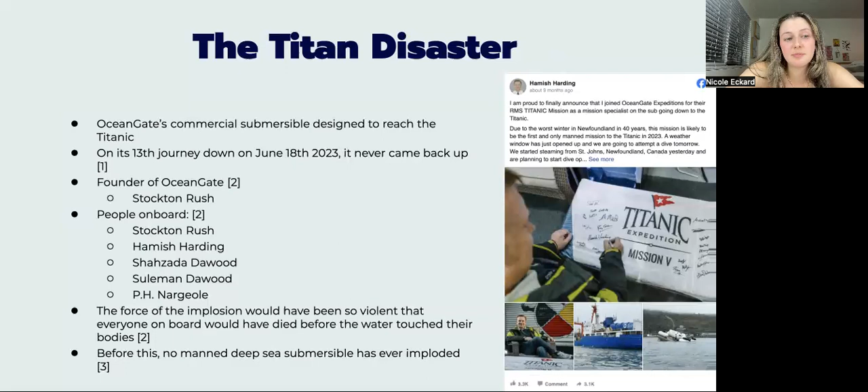The force of this implosion would have been so violent that everyone on board would have died before the water touched their bodies, so they wouldn't have felt it, which is good. Before this, no manned deep sea submersible had ever imploded.

So let's go through the final steps of the Titan's final journey. At 8 a.m. that Sunday, it submerged under the water. An hour and 45 minutes later, it lost contact with the Polar Prince, which was the boat that towed it to its location.

It also dropped the weights, which indicated that they were trying to abandon their mission because something bad had happened. It was supposed to resurface at 3 p.m. that day, and it never came up.

At 5:40 p.m., the Coast Guard was notified that something was wrong and the vessel never came back. Later, acoustic data found an anomaly consistent with an implosion when the communication was lost.

However, after that, sonar equipment detected banging noises Tuesday night and Wednesday morning. So some people thought that the Titan was still out there and the people were still alive.

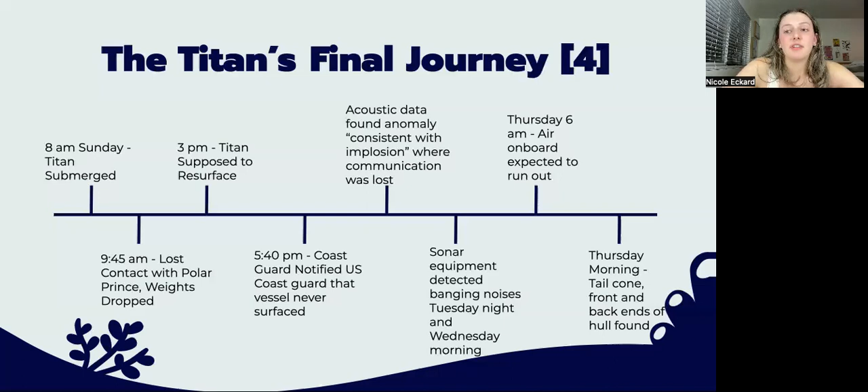Thursday at 6 a.m. was when the air was supposed to run out on the Titan, meaning the people would definitely be dead. Later that morning, the tail cone and front and back ends of the hull were found, and they figured out that the Titan had imploded and everyone was dead on board.

Just to start off, the differences between a submersible and a submarine: the Titan was a submersible, and submersibles are manned. They only go down for a few hours, and they need a mothership to get them to their location in the ocean. A submarine is usually autonomous, and it has enough power to go down for weeks or months, and it can leave from a port itself, so it doesn't need a mothership or any boat to tow it anywhere.

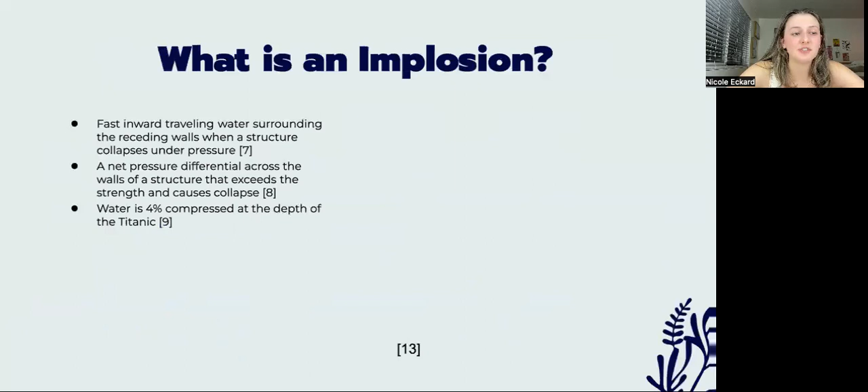Just to go over what an implosion is, there's a quick video here to watch.

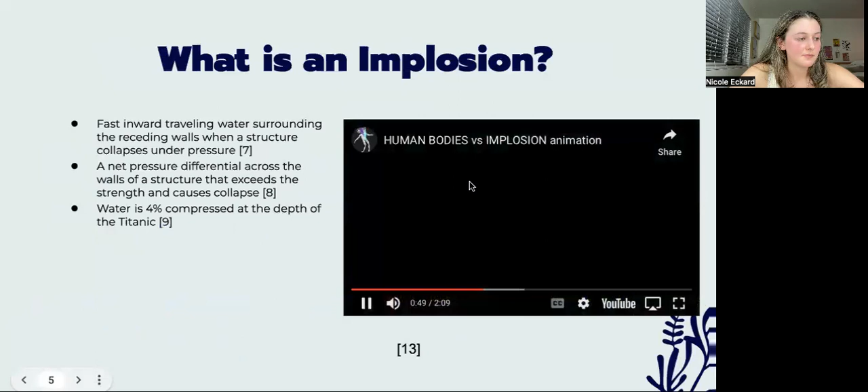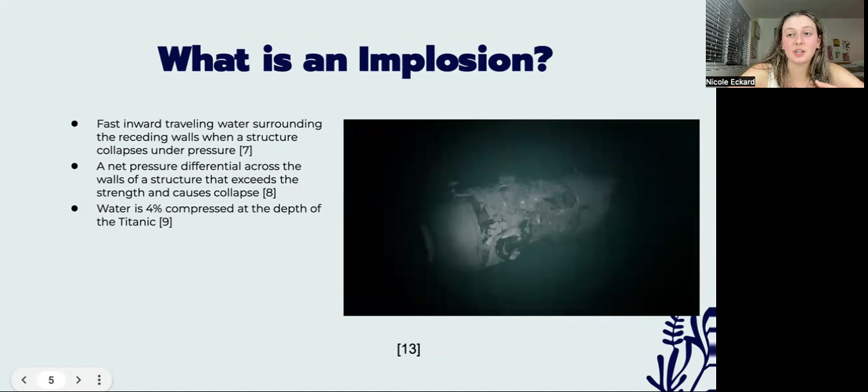This kind of just shows how fast the Titan would have imploded, and that shows how the Titan probably imploded. An implosion is just fast inward traveling water surrounded by receding walls of a structure when it breaks under the pressure. It's the net pressure differential across the walls that causes the collapse. So yeah, that's pretty much what happened with the Titan.

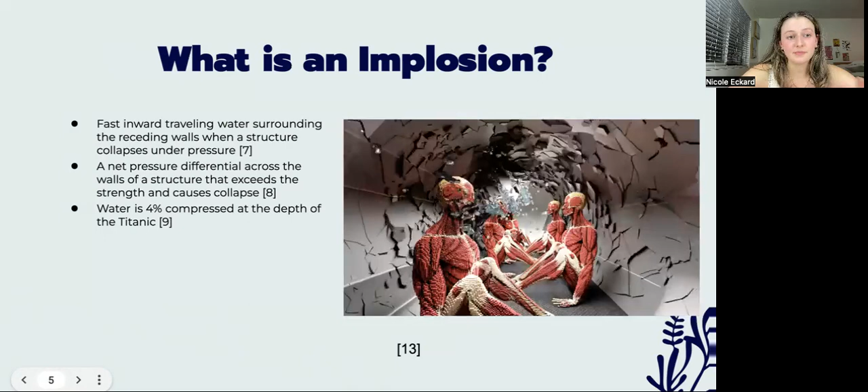At the depth of the Titanic, water is 4% compressed. Water is not really a compressible fluid, so when it is compressed and gets exposed to the 1 atmosphere chamber, it would be like releasing a spring with high explosive force similar to the speed of sound. You can just imagine how dangerous that force would be.

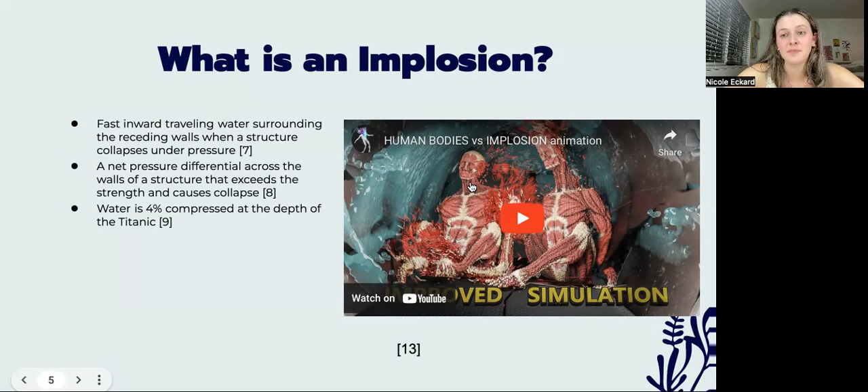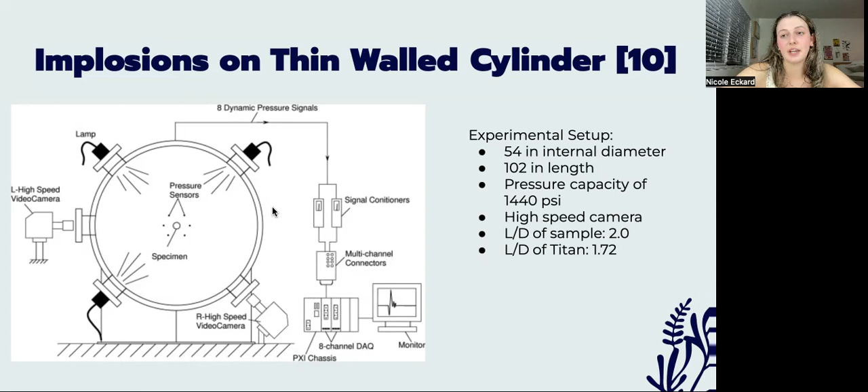The length over diameter, the L over D, that they did in the sample was 2.0, and the length over diameter of the Titan was 1.72.

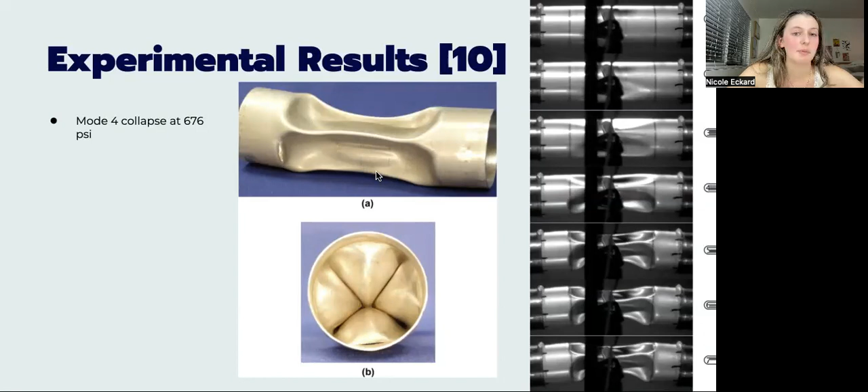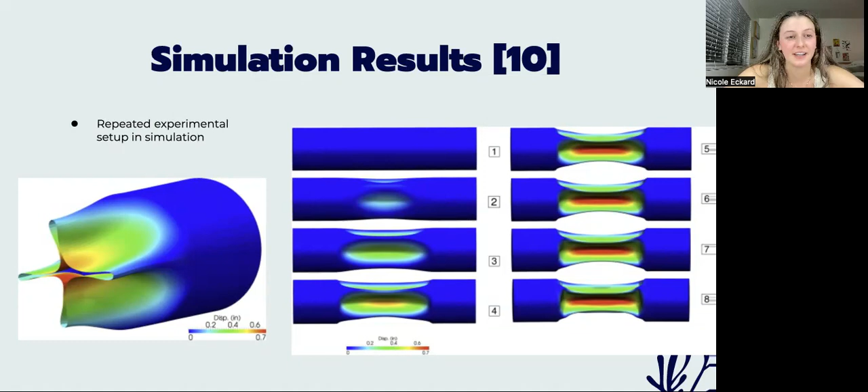After this, they repeated that same study in a simulation and found the exact same thing, which told them that their experimental setup was correct and verified the data. So yeah, that's pretty much what an implosion is.

A successful submersible that exists is the Alvin, and it was actually able to successfully travel up to 6,452 meters. A reason it is so successful is because it has a lot of routine inspections, it's always being recertified, and the Navy is auditing it a lot.

It's also disassembled, evaluated, and reassembled every few years, just to make sure everything's good. And at this point, at 6,400 feet or meters, it can access 99% of the ocean floor, so pretty much the entire ocean.

It also has a lot of redundancy, so if there's a failure, there's something else to back it up so it won't completely fail.

They call off dives if there's any suspicion. One instance of that was when they got new windows in one of the iterations of the Alvin, and they noticed a little nick in the window. Instead of continuing, they called off the dive and re-evaluated it, realizing that could have caused an issue.

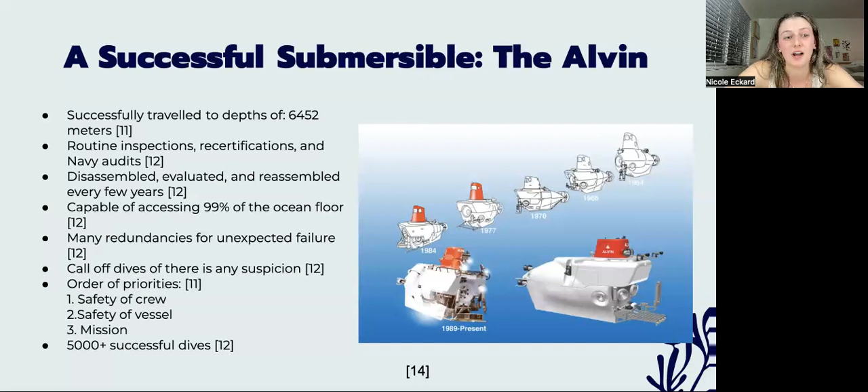So they were really strict about not going on dives if there's a problem, which you'll see the Titan was not doing at all. Their order of priorities on board was first safety of the crew, then safety of the vessel, then the mission. So safety was always more important than the mission, which is the opposite of how the Titan was operated. It's had over 5,000 successful dives.

Moving on to the differences between the Titan and the Alvin, there's a lot of key differences. The Alvin had a spherical hull, while the Titan had a cylindrical hull. The Alvin could only hold up to 3 passengers, while the Titan held 5, so it was a much larger hull. The Alvin was made out of titanium, and the Titan was made out of carbon fiber, which we're going to go into later about why that's bad.

The Alvin had a mothership, so it didn't get towed - it was literally on top of the ship and then put into the ocean, whereas the Titan was towed behind the boat, which could have caused extra damage to the submersible. The Alvin also had multiple small windows throughout its body, while the Titan had just one large window.

So there's 4 key reasons that I think it imploded. The main one being the hull, which was made of carbon fiber, and its shape. Also, I think the viewport was just a bad design, and the same with the whole warning system. Overall, it was just not a clean sheeted design, which is never a good idea for any engineering thing you're going to make.

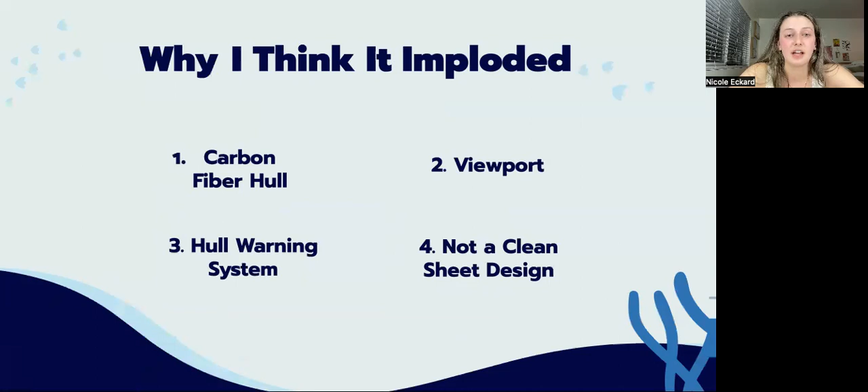Moving on to the carbon fiber hull - there's been reports of people who went on successful journeys of the Titan saying they could hear cracking during the entire journey. They could just hear it, and that's pretty scary.

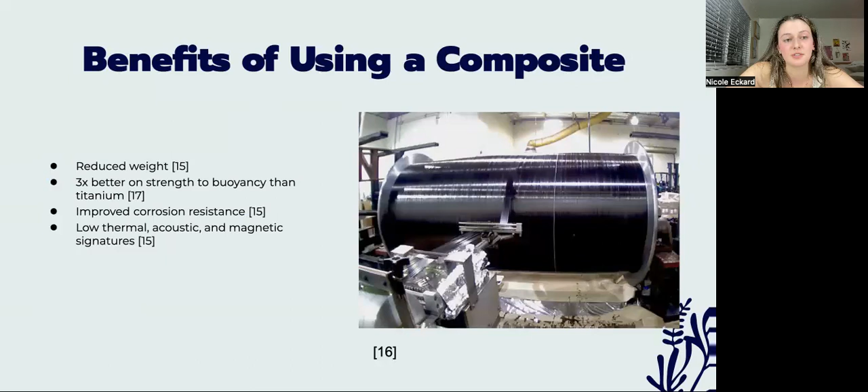The reason OceanGate even wanted to use a composite is because there are some benefits of using a composite for ocean journeys. First off, it's much lighter than titanium, and it's 3 times better on strength to buoyancy than titanium. It also has better corrosion resistance because seawater is a very corrosive environment, and composites don't corrode as fast. Composites also have low thermal, acoustic, and magnetic signatures.

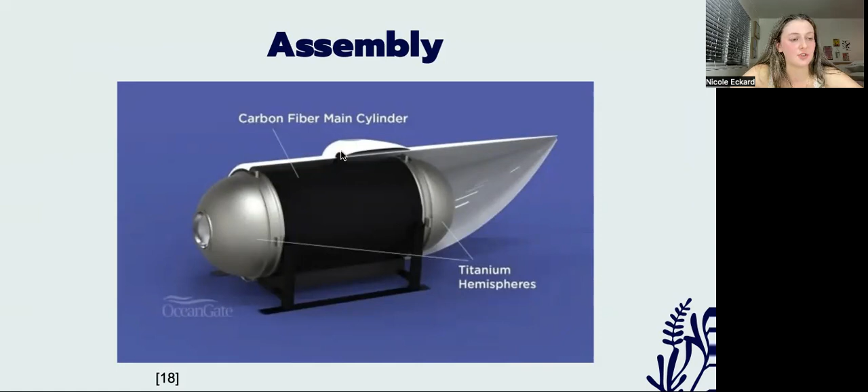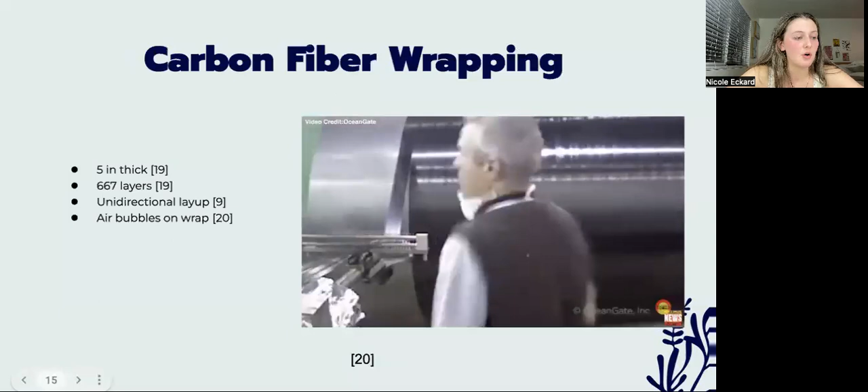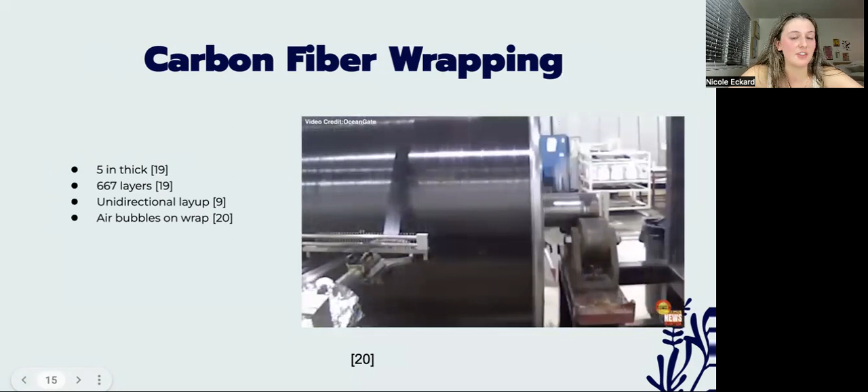Here's a video of how the carbon fiber wrapping was made. You can see it was wrapped around the hull only in one direction, unidirectional, which is really bad because it means it's only going to be strong in that one direction of the wrapping. It ended up being 5 inches thick with 667 layers. You can see air bubbles in the wrapping, which could cause little imperfections, not good in the long term for the strength of this.

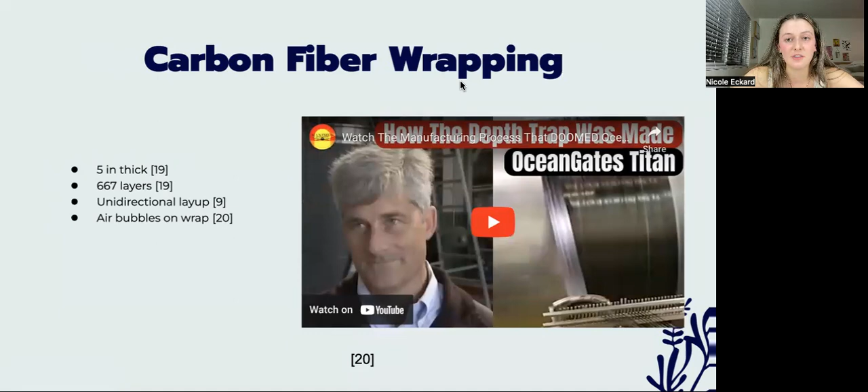Another issue was the adhesion method for joining the carbon fiber hull and the structural titanium rings - glue was the only way they joined the 2 rings.

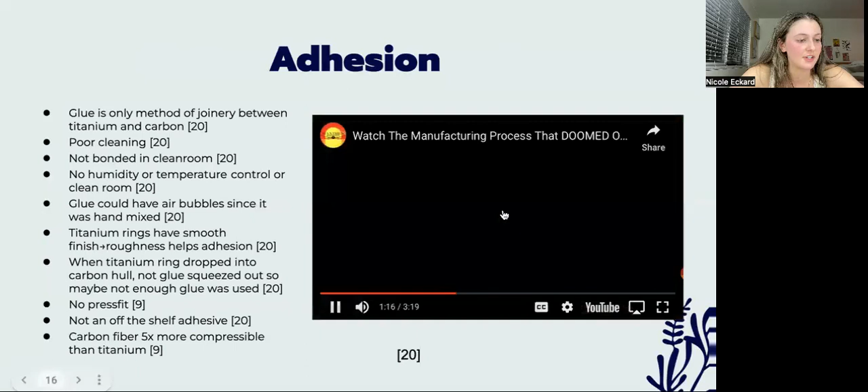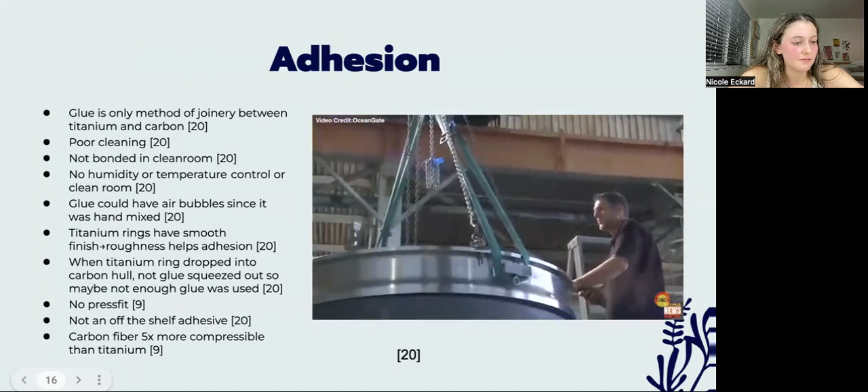I'll play this video too, showing it. The 2 components - really what's holding them together and allowing them to move together is the glue. You want nice, even movement. You can see here the glue, they were just dropping it in, and you want to make sure it's right into the hull.

It's pretty simple, but if we mess it up, there's not a lot of recovery.

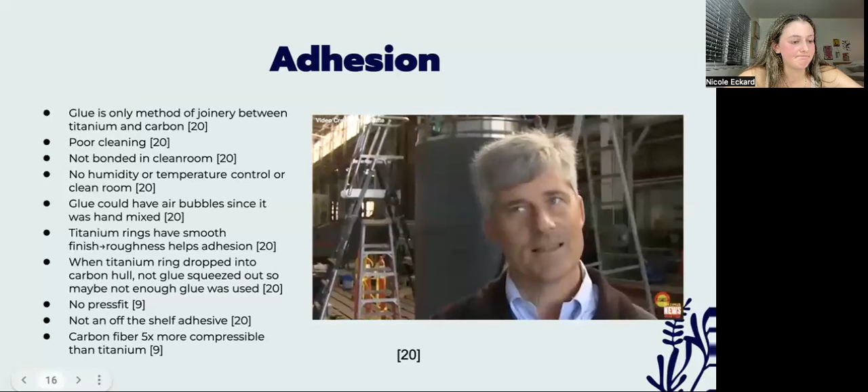Just to expand on that video, the glue was the only method of joinery between the carbon and titanium, so they didn't use any bolts or anything as a secondary method.

If you saw in the video, they were just cleaning it with a rag, but his hand was following behind it, getting it dirty again and adding oils. When doing adhesives, you don't want anything on the surface, so they definitely could have done a better job cleaning it. It was also not bonded in a clean room, which would have been a better environment to ensure the bond was good, and again there was no humidity or temperature control or clean room.

The glue was hand mixed for the adhesive, so there could have been air bubbles, and there's no commercial off-the-shelf glue proven to work for this kind of bond they wanted to make, so they had to improvise and make their own glue. There's no way to know if that glue would work, especially because they didn't do any testing.

If you saw in the video, the titanium rings were very smooth, and usually with adhesives you want a rough surface because it increases the surface area and makes it easier to bond the two together, making the bond stronger.

In the video, when the titanium ring was dropped into the carbon fiber hull, no glue squeezed out, so it's possible they didn't use enough glue, because with good surface contact you'd expect some glue to squeeze out. It also wasn't press fit in, it was just dropped right in, and if it was press fit, glue would have come out. So again, there was no off-the-shelf adhesive used.

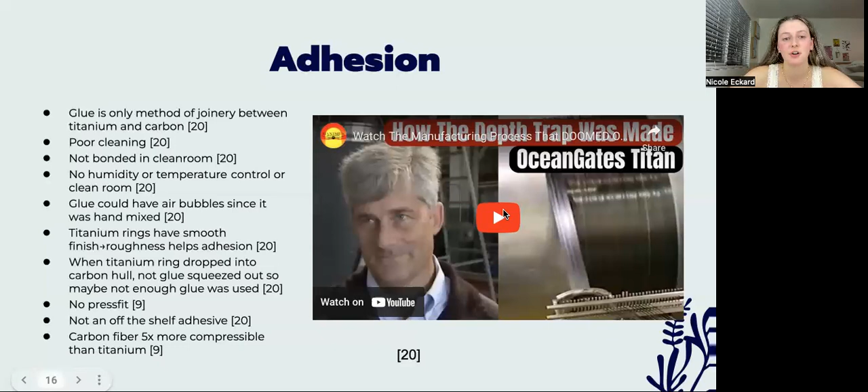Check measurements. Now moving on to the shape of the hull. Again, we can see the Alvin had a very spherical hull, which you can see in the picture here, while the Titan had a very cylindrical hull.

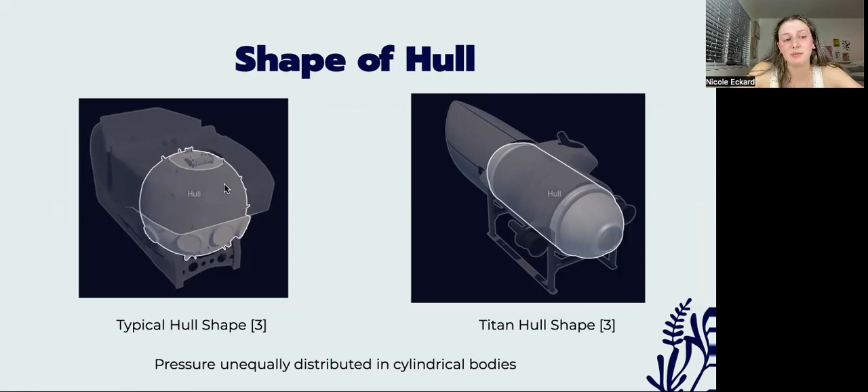In a cylindrical hull, the pressure is unequally distributed around the body, which could cause it to crush like a soda can. That's why typically all hulls in submersibles are spherical.

To relate this to airplanes - why a spherical hull is better than a cylindrical hull in the air - in a spherical stress matrix the highest stress is PR/2T, while in a cylindrical stress matrix it's PR/T, so twice as high.

This isn't the exact relationship for submersibles because all the data is still really experimental, and there's no closed solution for the stress matrix of submersibles, but it would be a similar relationship in that the sphere would be a lot stronger than the cylinder because the pressure is more balanced.

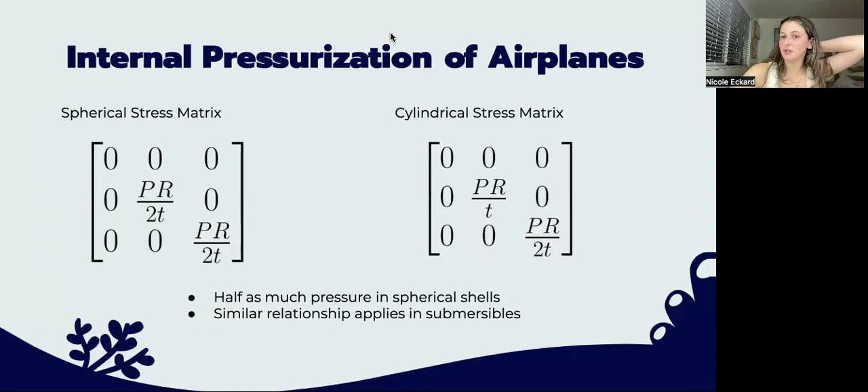In an airplane, that's why carbon fiber works - the pressure inside is tensile stress because the air inside wants to expand, so it's pulling the carbon fibers apart.

But in a submersible, the pressure is coming in, so the carbon fiber is actually in compression, and it's really not strong in compression.

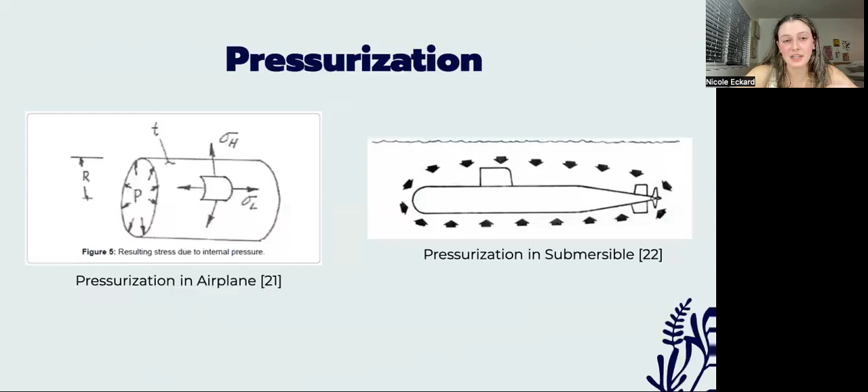Later we're going to have a video on carbon fiber in compression.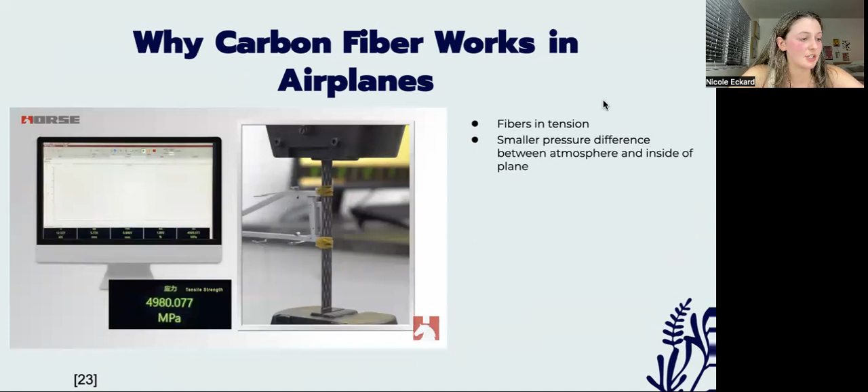Okay, so why carbon fiber does not work for deep sea compression or deep sea applications. As you saw in the previous slide, the fibers are in compression, and carbon fiber is not strong in compression compared to its tensile strength.

Carbon fiber is really only strong in the direction of the fibers, and the fibers were wrapped only unidirectionally, which means they would only be strong in one direction. Under any unstable loading, the carbon fiber would just not be strong at all. The strength in the other directions of the fiber are pretty much equivalent to the strength of the adhesive, which is not as strong as it should be.

And then the compression causes the buckling. So obviously when it's under compression, it causes the individual fibers to buckle and break. And then the cracks are also very hard to see because they're usually embedded in between the layers, so you won't be able to see the cracks from a visual inspection.

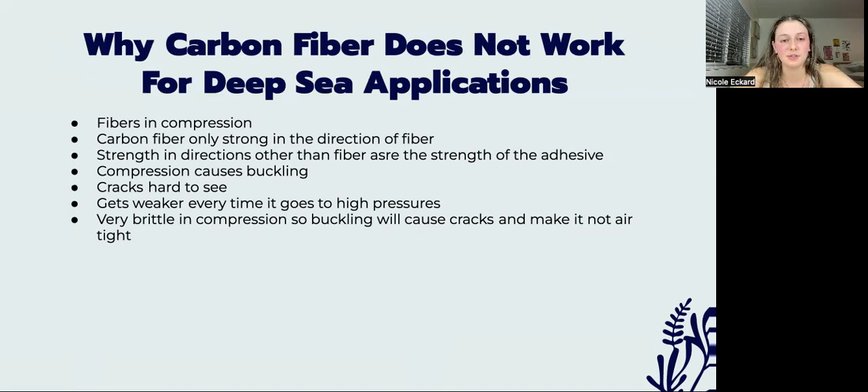So this was a study done on the implosion of carbon or epoxy composite hollow cylinders. The first study we looked at was metal, which isn't really related to the Titan. This one was actually done on carbon composite hollow cylinders, laminated carbon epoxy composite tubes that were filament wound, which is the same as the Titan, so they're kind of related.

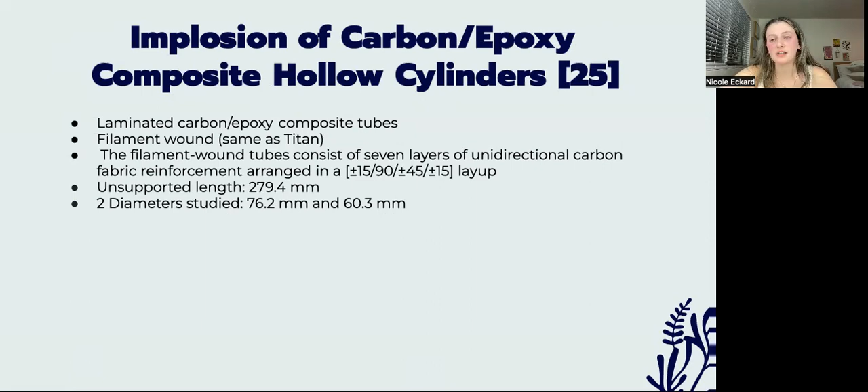The filament wound tubes also were 7 layers of unidirectional carbon, but placed in different angles, so this actually would have been stronger than the Titan. The unsupported length in the experiment was 280 millimeters, and they studied 2 diameters - I'm only focusing on the 76.2 because it gives a more similar length over diameter ratio as the Titan. So this was the experimental setup.

You can see it's pretty similar to the other tests I talked about, conducted in a large spherical pressure vessel, with a maximum pressure rating of 6.89 MPa. They flooded the vessel with water to get the best optical clarity they could, then filled it with nitrogen gas to pressurize it, increased gradually at 0.083 megapascals per minute until the specimen collapsed.

So this was what they did the test on. They had a speckle pattern on a cylinder, painted with marks of at least 2 millimeters diameter, so that each mark is 3 by 3 pixels in the recorded images.

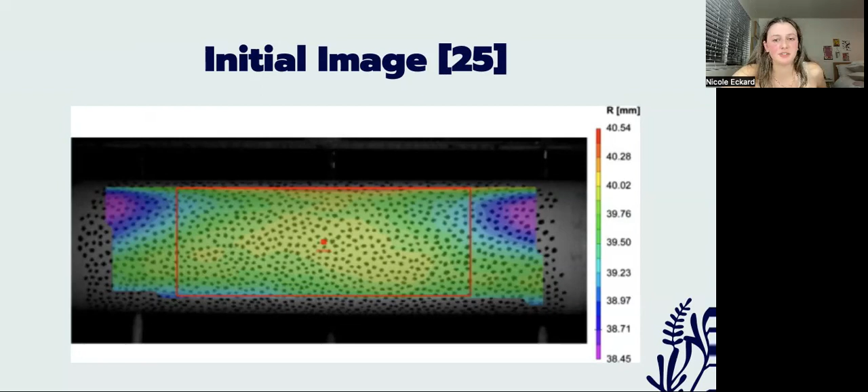So these were the results of the experiment under pressure. They found that the shorter L over D were a lot stronger, obviously, because they have a much smaller unsupported length.

Going through the testing here, at time B you can see cavitation begin and a longitudinal crack about to start. After this, once the crack began, there was an abrupt drop in the local pressure inside because it was breached, and that caused an increased acceleration due to the structural instability.

At time C, you can see this was the minimal pressure the specimen ever received, and there was even more cavitation coming, an increase in velocity magnitude and sudden loss of pressure, creating more longitudinal cracks. You can see in E it's actually starting to rip apart.

If you look at the plot here, you can see 2 peaks at E and F, similar to the peaks found in implosion studies, meaning that's when the wall contacts the center of the structure, which created those peaks.

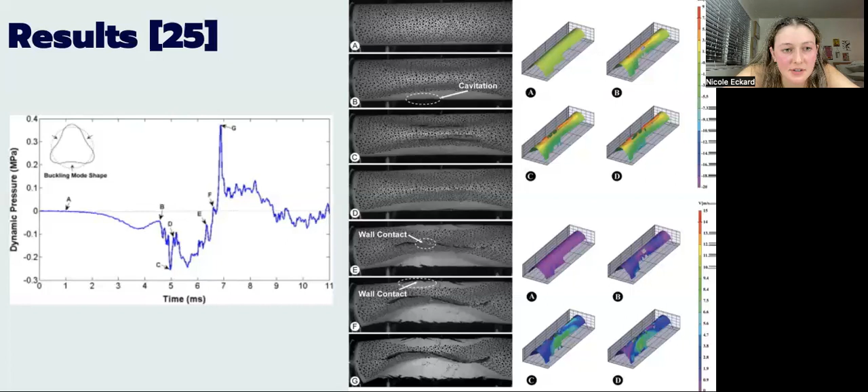You can see the largest peak in G, and that's from the high magnitude pressure pulse that caused the final buckling, which you can kind of see in the picture in G - it's like the worst of all the pictures.

From the results you can see there were longitudinal cracks, shown in A, and in the second picture in B they used optical microscopy to show the cracks, which are parallel with the fiber angle - meaning they were in regions of high tensile stress and propagated through the weak resin structure.

And then where C is, there's the fractured fibers, and those fibers are very short and very small. So that just shows that it was a pretty brittle collapse, and there was very little fiber pull-out.

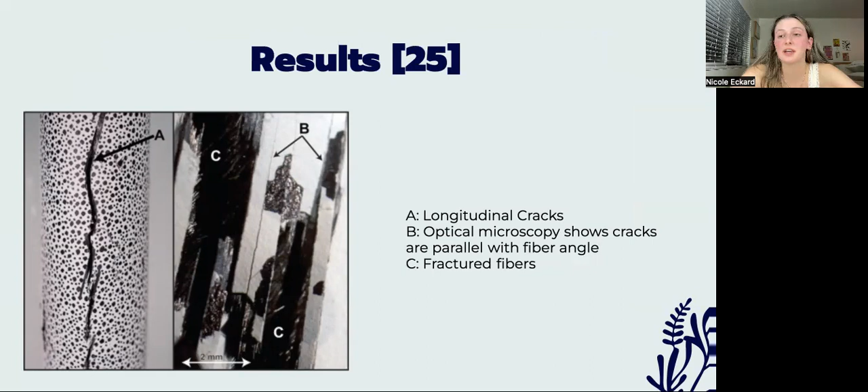And then these are just different carbon fiber buckling modes. Going back to the previous one, I think the Titan actually failed in a manner similar to what this study was showing, so it most likely did implode like this study. I think that was the main failure mode of the Titan, the thing that made it go bad the fastest and the quickest. But all the other things I'm going to talk about just added to why the Titan was bad. So again, here are the different carbon fiber buckling modes you can see.

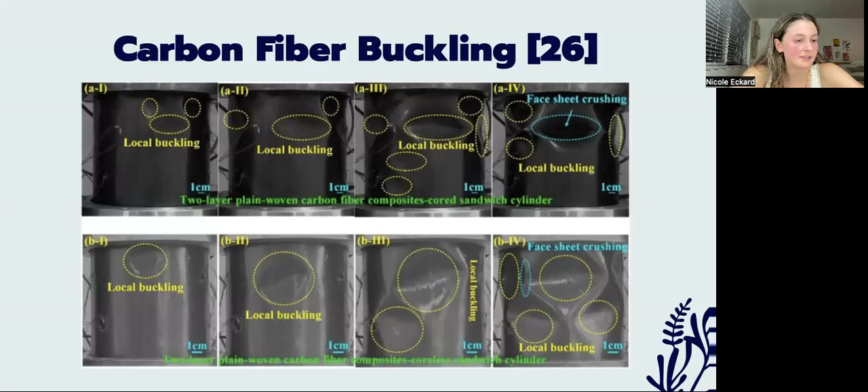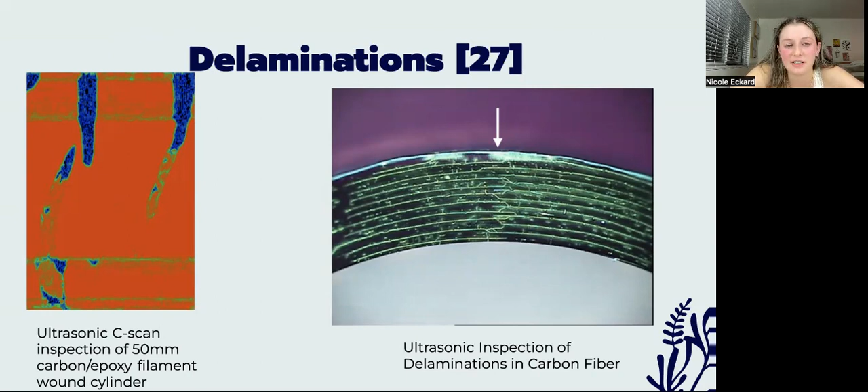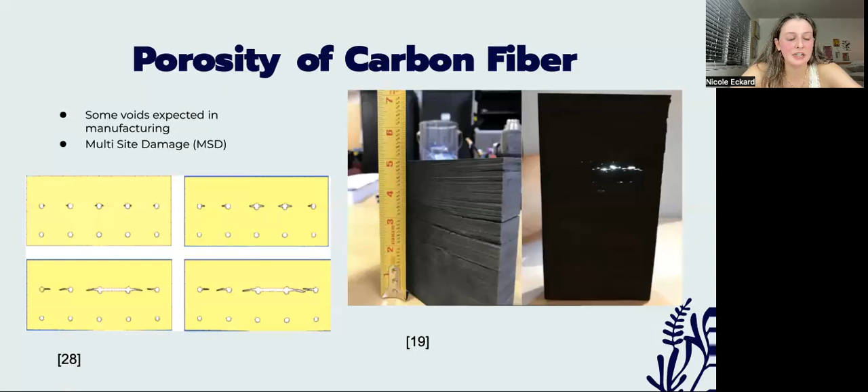Specifically for the Titan, it was found to be a very porous carbon fiber, which is not good. There were obviously going to be some voids in manufacturing, but all the voids, under increased fatigue, would slowly come together like in the picture and create multi-site damage, leading to the overall fatiguing of the Titan every time it makes a journey up and down. On the right, you can see the actual carbon fiber used in the Titan. One of the engineers shined a flashlight on the back of it, and you can see there are very big voids in the carbon fiber.

Now moving on to the viewport, and why I think it was not designed very well. The viewport was 21 inches in diameter and 7 inches thick, giving a diameter-to-thickness ratio of 3. Compared to the Alvin, which has a ratio of 1.43, about half.

The engineers at OceanGate thought the acrylic would give a good warning if it was failing, by crazing, which obviously would not be enough warning for the submersible to come back up and resurface. The window they had was only certified to 1,300 meters, and the Titanic is at 3,800 meters, so it wasn't classed for the depth this was going to. OceanGate also refused to pay the manufacturer to build a viewport that would meet the required depth, which shows how they really didn't care about what they were designing.

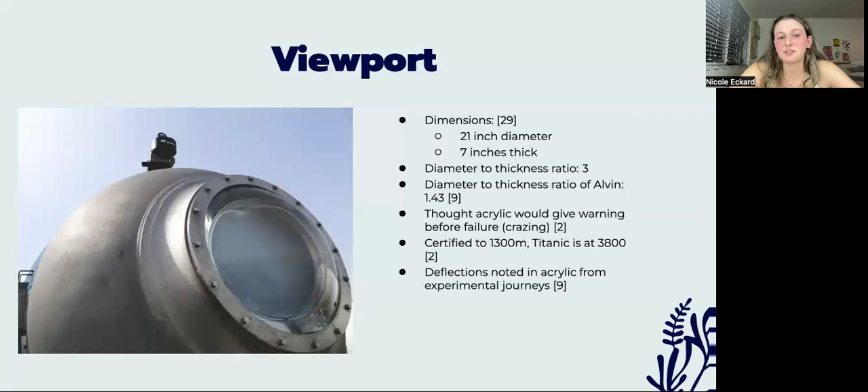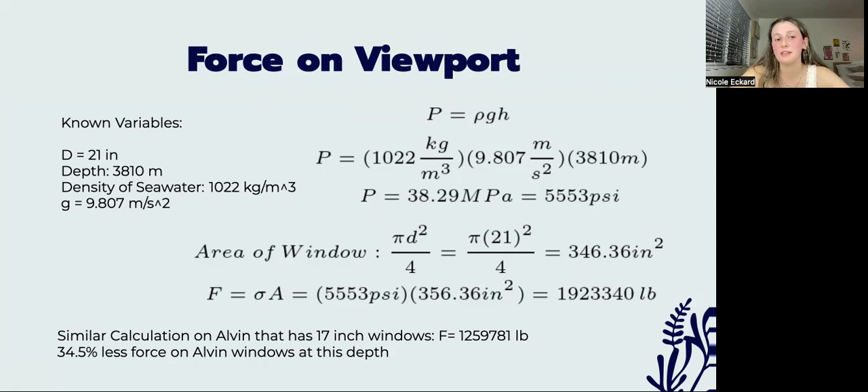Lastly, from initial and experimental journeys, there were deflections noted in the acrylic, and nothing was ever done about that. On a quick calculation of the force on the viewport, the force from rho g h was over 1,923,000 pounds. On the Alvin, a similar calculation gives only 1.2 million pounds, so 34% less force on the Alvin windows at this depth, a pretty big difference, and why the Alvin was able to survive and not the Titan, even though I don't think the viewport was the main thing that caused it to fail. If the hull hadn't failed, the viewport probably eventually would have.

And for the hull warnings, number 3, the hull warning system was not very good. It was pretty much a system that depended on audio noises, listening to the cracking to see when it was about to fail, which would not be good.

They advertised why it works as a real-time monitoring system, sampling sound waves through the hull multiple times a second, claiming that's even better than having an actual strong hull, which is obviously not good. They were spinning it into a positive thing when talking to the press or potential customers.

They said it provides accuracy in assessing the health of the hull, which maybe it will, but it won't be able to warn you before the implosion happens once there's an instability in the hull. They said they completed extensive testing showing increased acoustic activity always occurs before structural failure, but again, it will occur, just not something you can sense fast enough.

And then they were just telling everyone that they would be able to resurface before any damage, which they were clearly not able to do.

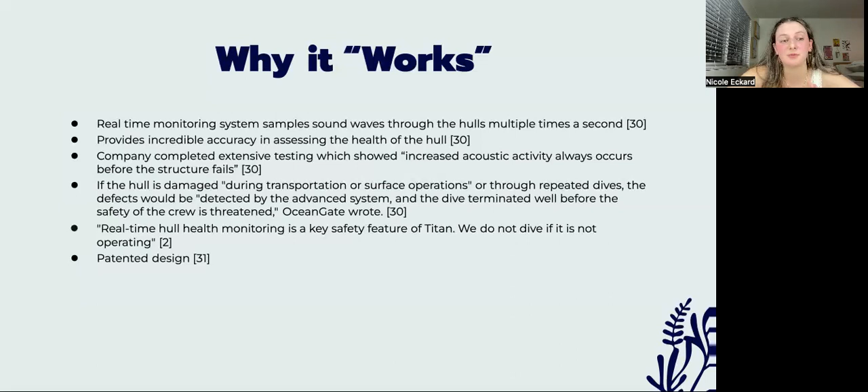Because real-time health monitoring, again, they were just talking about how good this real-time health monitoring is when it was really not that good, and they also patented the design to make it seem even more viable.

So why that actually didn't work: they did no non-destructive testing on the hull, so they had no idea of any existing flaws in the material. Even if it wasn't cracking, there were probably still existing issues.

And from other customers that went on the Titan before it completely imploded, they could hear the cracking of the hull as they went down.

Lochridge was the engineer working on this, and he was told that no form of equipment existed to perform a proper test, so that's why they didn't test it - there just wasn't enough equipment. But not testing it is still not good.

Acoustic analysis just shows when something is about to break, it doesn't prevent the breakage or anything. So really, once you know it's about to break, your destiny is already set and there's no way to resurface the Titan quick enough.

There's data showing implosions happen within a millisecond to nanosecond of structural instability, so you can see in the video I played at the beginning how fast the implosion actually would have happened.

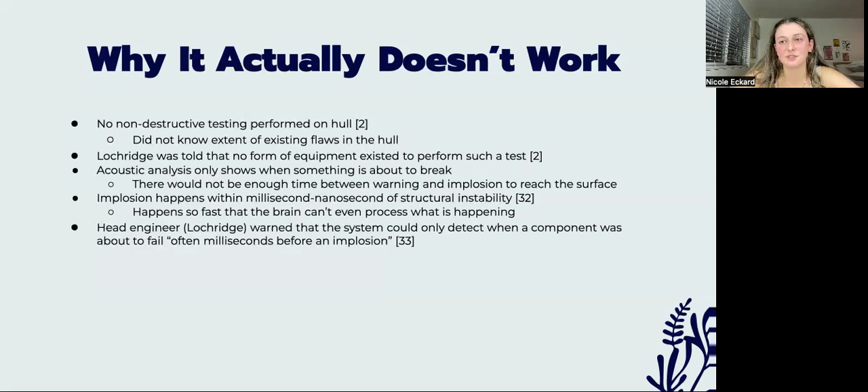And that's pretty much why the acoustic sensors were not a good idea and should not have been their main way of detecting failure.

And then lastly, the Titan was not a clean sheeted design. It actually started with them iterating on an initial model which wasn't even close to what they were trying to do. In 1996 it started off with Antipodes, which OceanGate just bought from someone else.

So they didn't actually make it - they refit it to be a tourist submersible in 2009. Then after that, they iterated on that to create Lula, the first submersible actually made by OceanGate, collaborating with the University of Washington's Applied Physics Laboratory.

This was actually the first one they made, but it took inspiration from Antipodes. It was pretty much a cosmetic and electrical refit of Antipodes, and the hull was shaped like a capsule pill, with a large viewport at one end covered by the blue cover in this picture. This was only designed for a max depth of 500 meters.

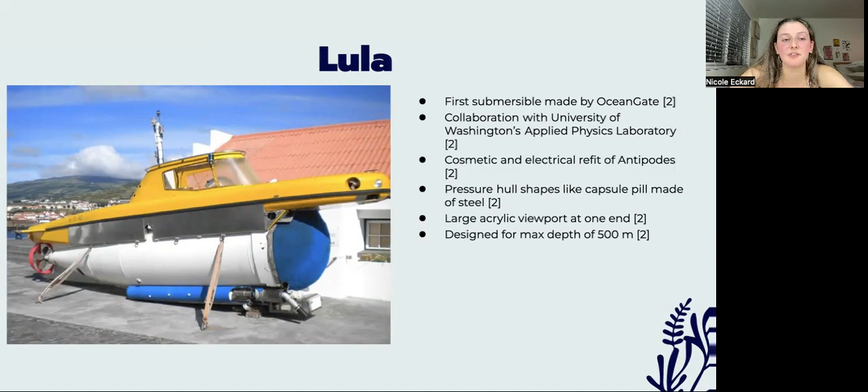Then from the Lula, they made Cyclops 1, which looks pretty similar to the Lula. In this iteration they got rid of the duplicate control systems, which I'm not sure why they thought was a good idea, because it's always good to have redundancy. They also fitted it to run off a PlayStation 3 controller, so the pilots could be trained quicker.

Cyclops 2 was the next submersible that came after Cyclops 1, which again was just a refit with slight tweaks of Cyclops 1. This is when he decided he wanted to reach the Titanic, and they kept most of the design elements of Cyclops 1.

As soon as they talked about taking this to the Titanic, the University of Washington cut their contract, even though it was only one-fifth completed, which is just a bad sign when someone's pulling all their funding and help.

Their control system had a hand controller talk to the Wi-Fi unit, and then the Wi-Fi unit talked to a black box, which controlled the thrusters, and this was all run on Bluetooth. So if there was any drop in signal, it would just stop working.

Normally things are hardwired, so when signal drops out, control still works. It would have been a better choice to do hardwiring of the system, and this was an unclassed submersible.

Then Cyclops 2 became what we now know as the Titan, the vessel that imploded, which is very similar - it was pretty much just a cosmetic refit of Cyclops 2.

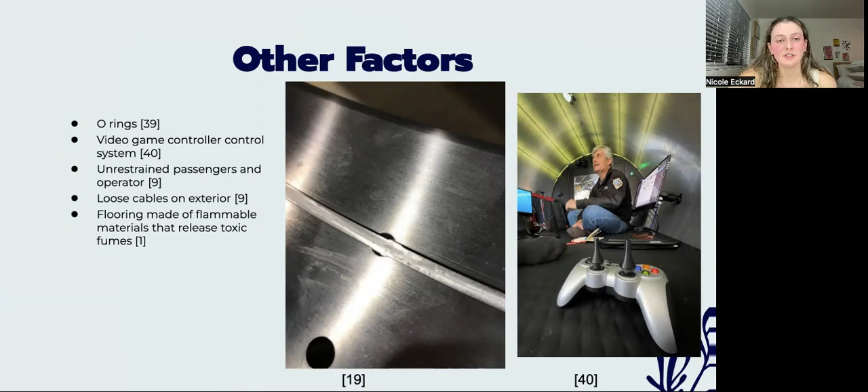And then that indicates that the connection between the body and the viewport failed because there's no viewport. And then another debris they found was the titanium rings. So clearly, since those were able to be uncovered and they are not broken or anything, that means the titanium rings did not fail, and titanium is a better material to make a submersible out of. So that means maybe they should have made the entire thing out of titanium.

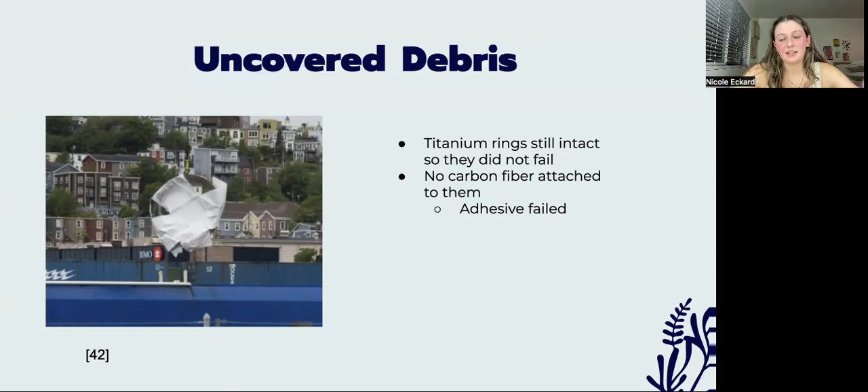And the carbon fiber, you can't see in this picture, but there was no carbon fiber attached to the rings, which indicates that there was a complete total failure of the adhesive, and that's why none of it is still stuck onto the rings. There was also no carbon fiber attached to any parts of the vessel. So that indicates that was most likely the first thing that went out, and a catastrophic failure of the hull. There were some other parts of the vessel, but no carbon fiber uncovered.

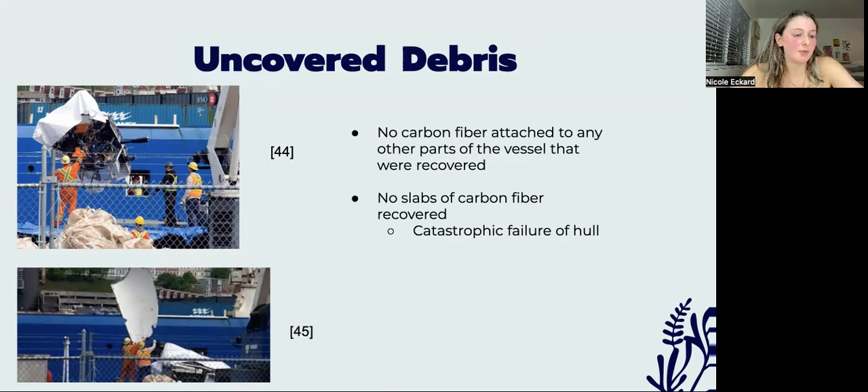So in order to correct this, there's a few things I would do. I personally think they shouldn't have used any of the things they did in this. They shouldn't have done a cylindrical one because the spherical shape is much, much stronger. They did a cylindrical one because they wanted to fit more passengers, but that wasn't really the correct choice, and they shouldn't have done that.

They also should have used titanium because that's proven to work, and even if they didn't want to do testing, it would be a lot easier to test the titanium, and they could back it up with other successful submersibles. And then I would have used some adhesive and bolted attachments for the rings and hull. So if the adhesive failed, then the bolts would have been fine. Again, it's just good to add redundancies in a design.

And then obviously more testing. They didn't test at all. They didn't do any non-destructive testing. They should have done that to see the existing irregularities in the hull before sending people down in it. There was a lot of criticism from other engineers, and they didn't listen. They just kept being confident in their design and didn't take into account any of the opinions of other people and other specialists in this field. So it would have been good to listen to the critiques of others, because that could have prevented this whole

thing. And then if they wanted to keep the acoustic monitoring system, they should have added an additional warning system, even though a warning system may not have even worked at all. They probably just should have checked the material before each dive to make sure it was good to go.

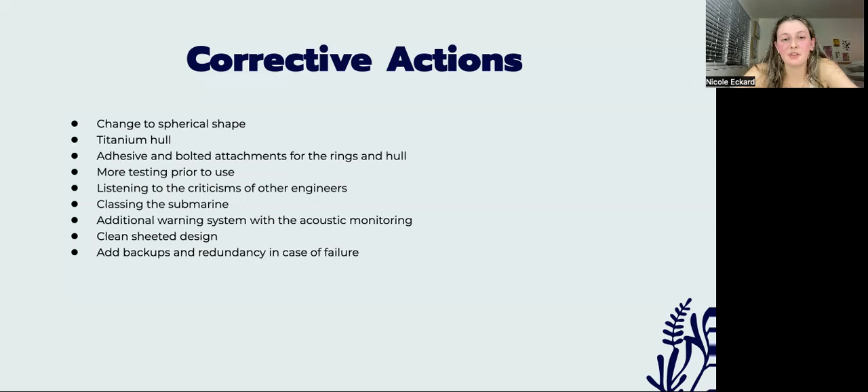And then there would have been no lives lost. So just from this, there's a lot of ethics that were kind of not really good ethics in this project, and there was a fallout, obviously.

I just want to start with this quote by Stockton Rush, the owner of OceanGate. He said, 'You are remembered for the rules you break, and I've broken some rules to make this. Carbon fiber and titanium, there's a rule you don't do that. Well, I did.'

So clearly he knew he was breaking rules, and he just continued to break them. In terms of ethics, Stockton Rush was warned by many other scientists and engineers not to continue. A lot of people sent letters to the government, tried to stop him in any way they could, and he just did not listen.

He specifically structured this project to be out of U.S. jurisdiction, because in the U.S. you're not allowed to go in an unclassed sub. He said the idea was developed and assembled in Washington, but it was actually owned and registered in the Bahamas. Since it only operated in international waters outside of the U.S., the classification rule that your sub had to be classed didn't apply to him.

And under U.S. regulations of submersibles, it's really bad if you kill a passenger on it, but if you kill a crew member on it, it's not as much of a bad thing.

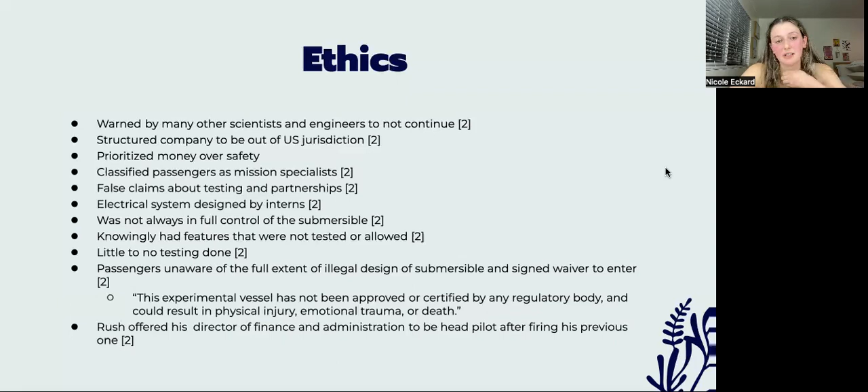So then I would say the biggest breach of ethics was the Lochridge lawsuit that happened for the Titan. David Lochridge was one of the engineers, and he wrote up an inspection report detailing pretty much 25 issues he found about the submersible and was urging Rush not to put people in it. After he brought this report to Rush, he was immediately fired and given 10 minutes to leave the premises. So obviously that was wrongful termination.

So Lochridge contacted the Occupational Safety and Health Administration, OSHA, about the wrongful termination, and their investigator contacted OceanGate, saying they were investigating the firing as a whistleblower situation. OceanGate responded by threatening him to drop the lawsuit, saying that if he didn't drop it, they would sue him, destroy his professional reputation, and accuse him of immigration fraud. Lochridge did not drop the report, so he went to court with them.

The OceanGate lawyer even said that Lochridge orchestrated his own firing because he wanted unemployment benefits. What OceanGate was asking for in their settlement included resolving all claims against OceanGate, withdrawing the OSHA claim, paying $10,000 in legal fees, and signing a non-disclosure agreement. Lochridge did not agree to the settlement, and they followed through with the lawsuit in June of 2018. Lochridge filed a countersuit in August of 2018, and in November 2018 they settled out of court. No one knows what came from this or what the specific details of the settlement were.